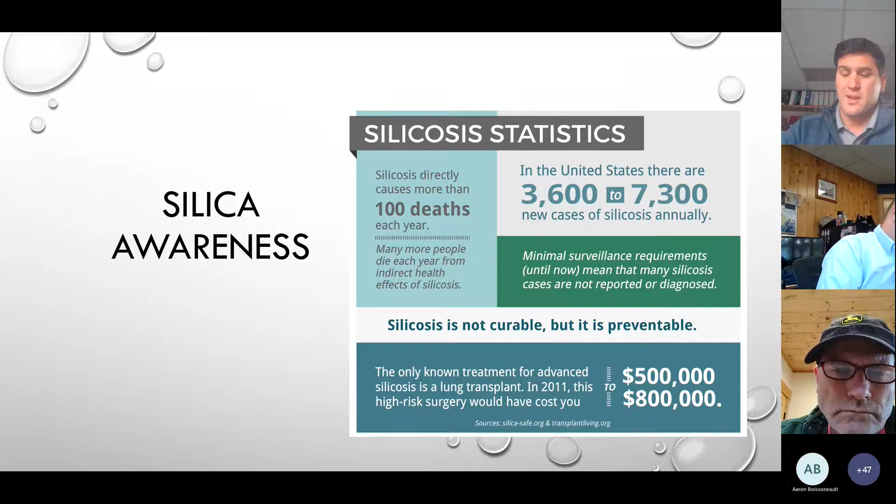So we need to do our best to try to control the dust, and the way we do that is follow our Table 1. For us, it's utilizing an integrated water system anytime we're doing circular cutting, or there's a dustless collection system, which is our Hilti-Vacs, for any time we're doweling concrete or drilling into it or chipping it — try to either water it or vac it up with a vacuum.

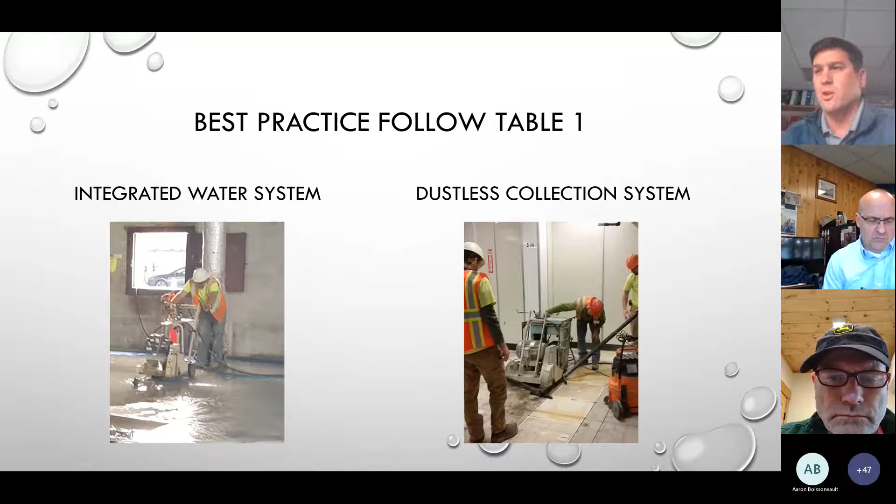The vacuum is located in Tal Nelson's office. We have about 4 of them now, and a lot of our integrated water systems are all available in the tool crib. If you're looking for any shrouds or hollow drill bits, those are also located in the tool crib. For any alternative methods that's not on the table — and I'm going to show everybody where Table 1 is located in a second — we do have two dust monitors.

Dust monitors that we can collect and send out to a lab to see how we're doing with those environments. Again, the standard is 50 micrograms per meter cubed for an 8-hour day. We've done it for our grout mixing plants, and we're under the threshold there. But if there are any unique situations that we're unsure about how to control dust, please contact me so we can come up with a good best practice to make sure we're in compliance with the standard, and most importantly, that we're not exposing our workers to a potential health hazard.

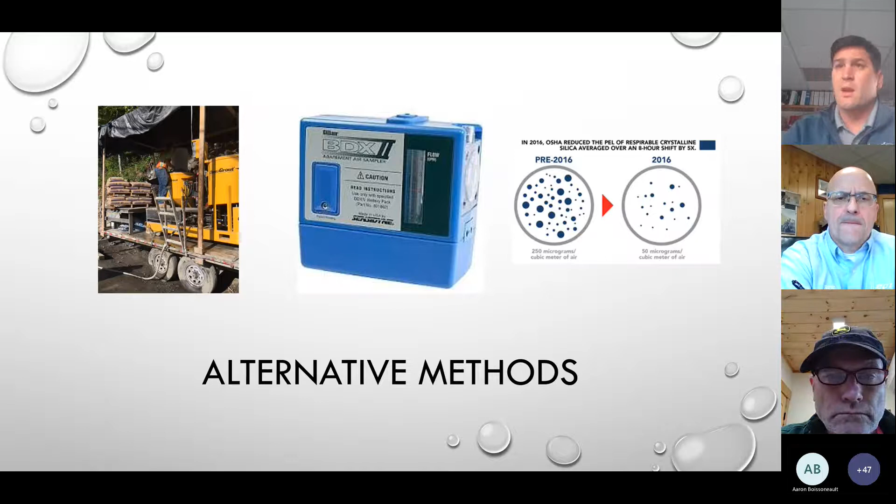Our Silica program is located in our Teams Foreman channel under Files and Library. You'll see it there. So when you're moving through the channel, I'll try to quickly share that to show everybody where it is.

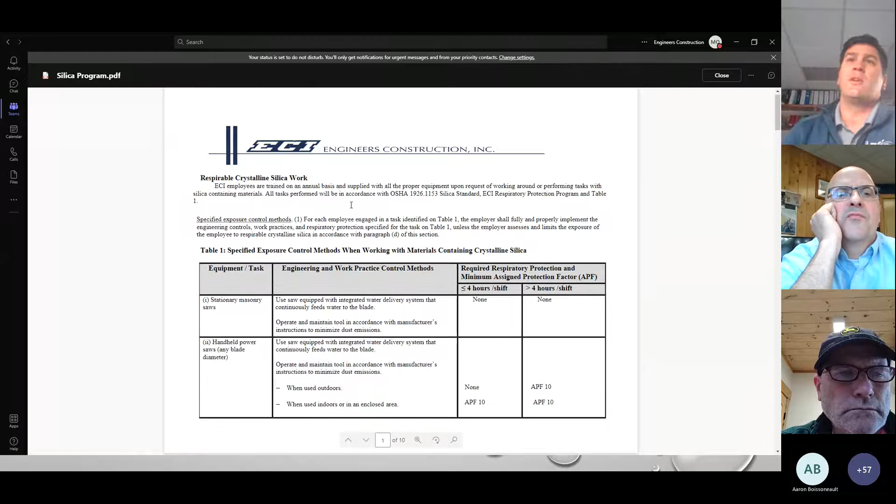Do a quick little exercise here. Thank you, Matt. On your Teams Foreman's channel, you click here, you click General, you hit Files, and then Library. Then you can see all of our program manuals that VOSHA loves employers to have, and here's our Silica program right here. You click it, and you'll be able to see our table, a little brief description of how we want to operate and best practices, and here's our table.

So handheld power saws — this is the majority of what we do out here. Use a saw equipped with an integrated water delivery system that continuously feeds water to the blade. If we operate and maintain the tool according to the manufacturer's instructions to minimize dust, when used outdoors less than 4 hours, we do not need any respiratory protection.

If it's more than 4 hours, that's when we start having to use the APF, which is your assigned protection factor. 10 is just a dust mask. Once you get into the 25, that's a half face respirator. 50 is a full face respirator, but we don't really get into those scenarios all that frequently.

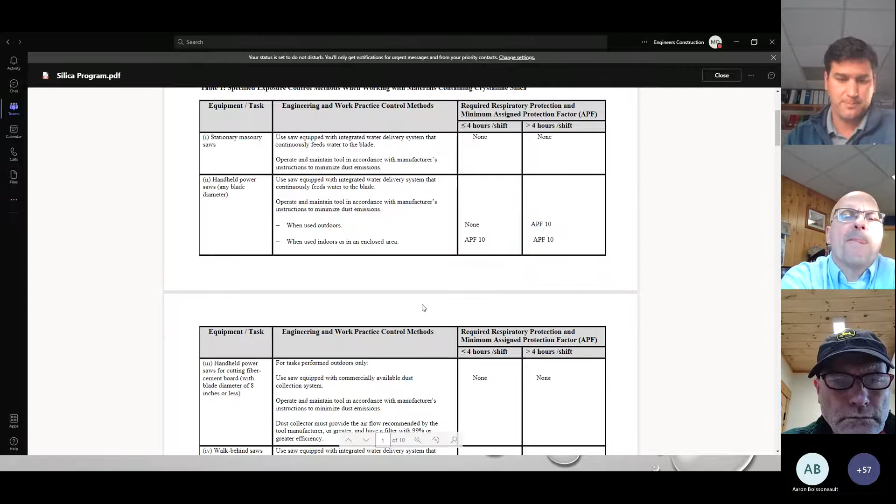So if there's any more questions on Silica, please contact me after the meeting. And Ken, if there's anything to add, feel free to jump in. If not, you can take control.

It all sounds good. Are we likely to be asked about this program and to show the program if there's an OSHA compliance officer that stops by? So would they ask our field superintendent to show them that, or would that be something they would allow a response back at a later moment anyway?

Best practice would be to nip it in the bud right away. Yeah, you give them time to think, they'll add stuff, and then we'll have to fight to get it removed.

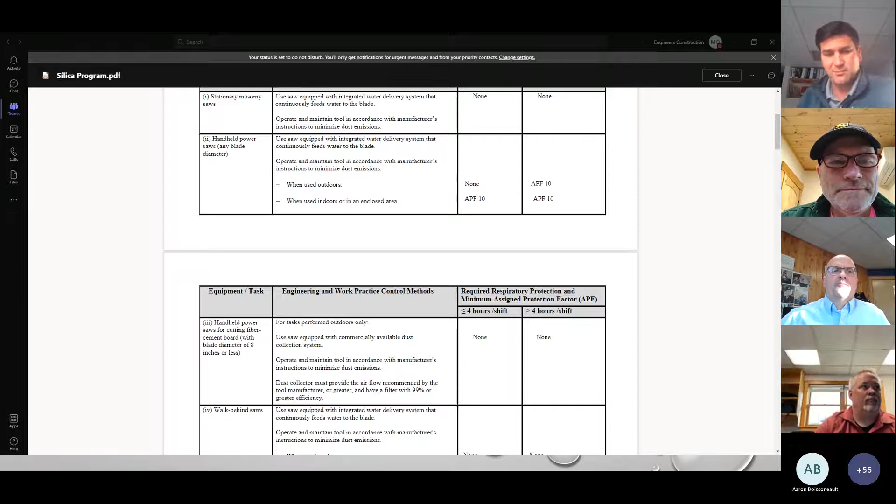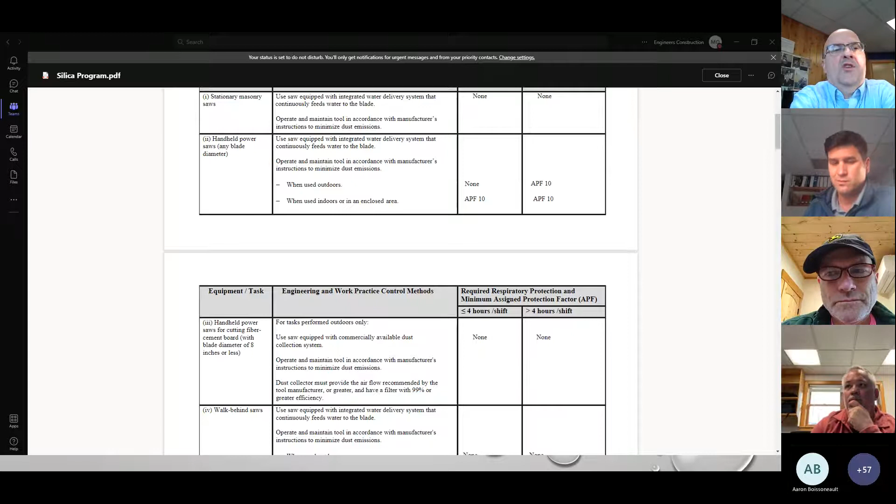So Matt, I think it's good when you're out visiting with the guys, sometimes just help them make sure they know how to navigate to this section of Teams on their tablets. I have pretty good luck on my phone with Teams sometimes to look stuff up in this channel. So maybe a little bit of help to the guys when you're out there. Say, hey, show me how you can navigate to the Teams channel so I can make sure that you can do it. Because they may not ask you.

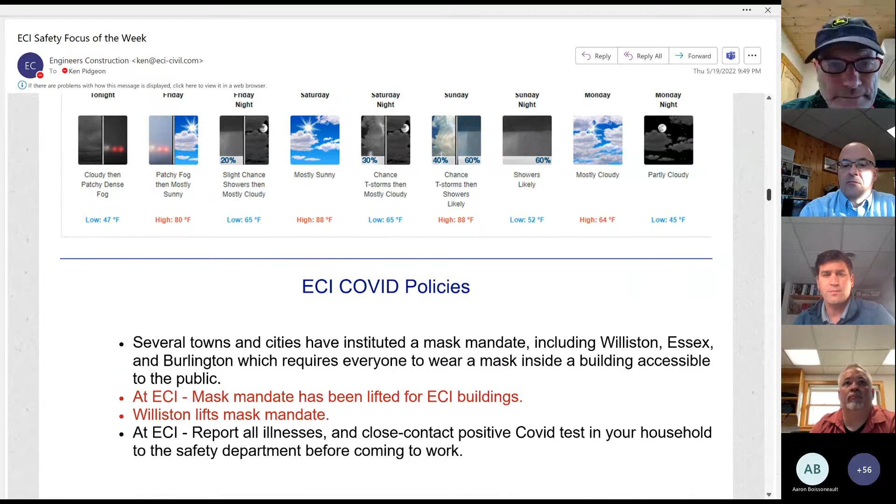Matt will send out a Teams reminder that any crews working tomorrow would be allowed to wear shorts if their project allows, and a reminder to take other measures to protect yourself from heat stress. COVID policies are attached again, no changes there.

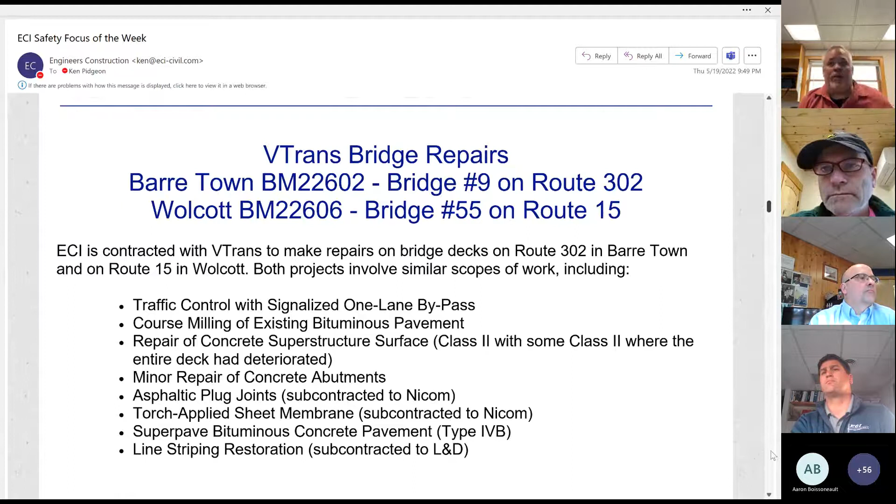Barre is, I believe, Brad finished yesterday, so that one's complete. And Wolcott, I believe he's pouring concrete today on the second phase, so the first phase is done. Dan Borbeau also got up there in Wolcott and got that one started and did the first phase. And then with the additional work in New Haven, he's kind of been down there with Alec, championing that one. And Brad stepped in and is going to finish up Wolcott for us.

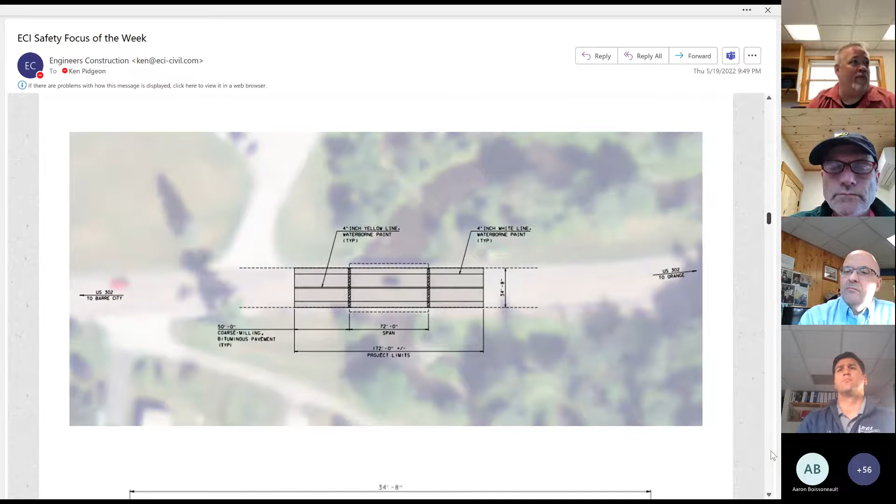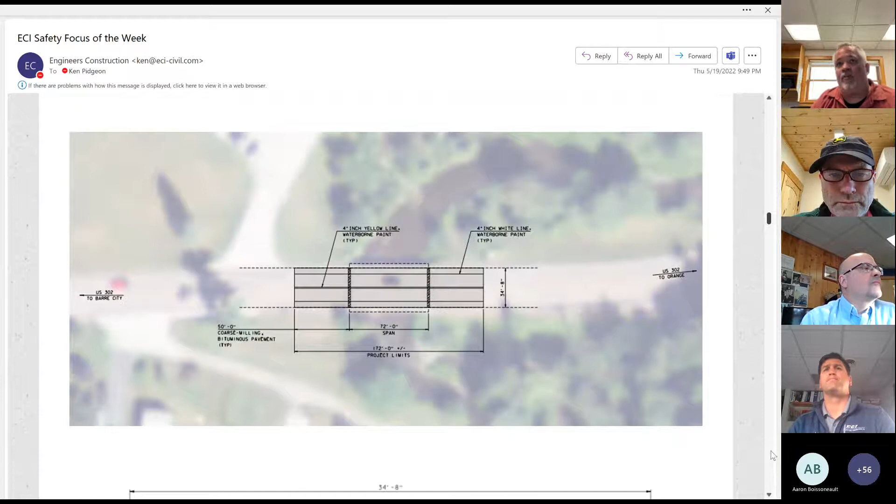So this one here, I believe, is very similar to Wolcott, except Wolcott's a little bit smaller bridge. Basically, you can see we've got the bridge itself in the 72-foot span, and then 50-foot approach on either end. The approach work is just milling and paving. And then the bridge work itself, as I said, was what I call dental work - basically go in and chip out the bad concrete, typically down to the first mat of rebar, and then pour it back. And Wolcott was pretty much the same exact design as Barre.

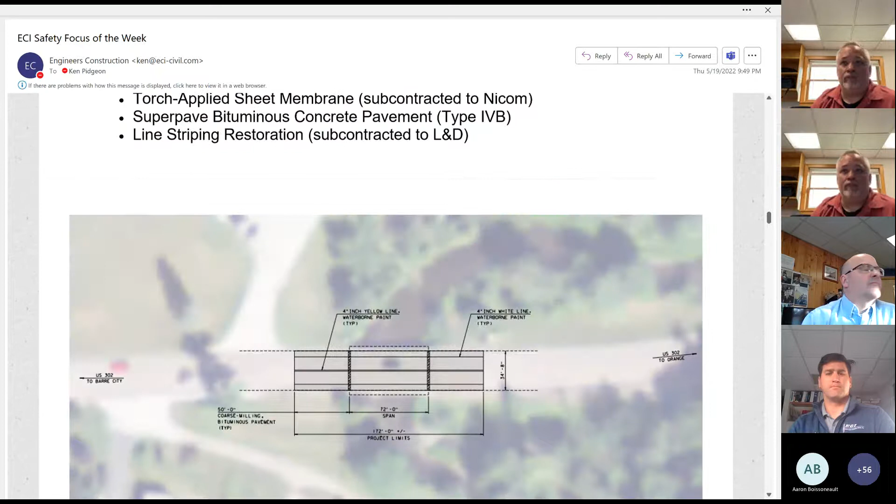All right, I'm messing up here. I just wanted to get the section in for - this is the first bridge here.

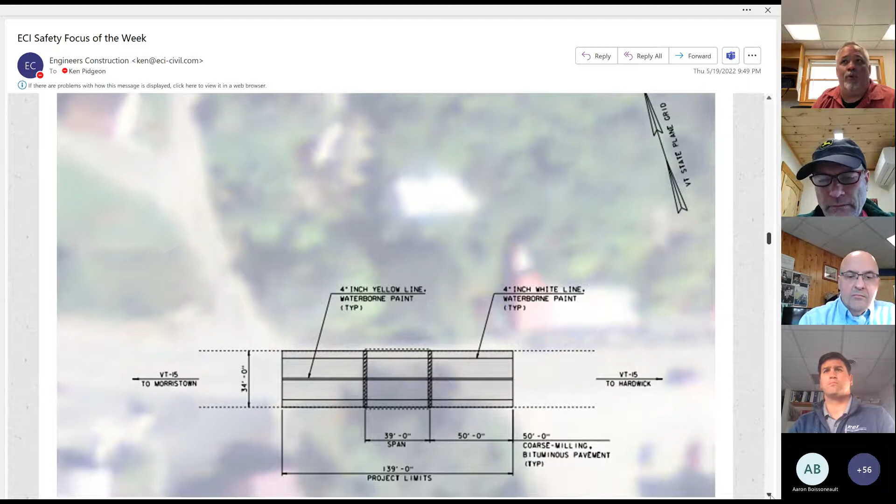Barre was a steel beam construction. Wolcott actually was concrete T-beams. And what we found in Wolcott was a project had come through after the original construction of the bridge and had redone the outside T-beams, so those were in a lot better shape than the center. Basically, the repair work was along the center of the bridge on both sides, because that's the original construction, and the concrete had deteriorated more there.

Both jobs ended up with a little bit of what they call class 3 repair, which is where you go right through the deck, and we had to do full depth reconstruction in those few spots. Barre had a little bit in phase 1, I don't even believe we had any in phase 2, and Wolcott was just the opposite - we didn't have any in phase 1 and had a little bit in phase 2.

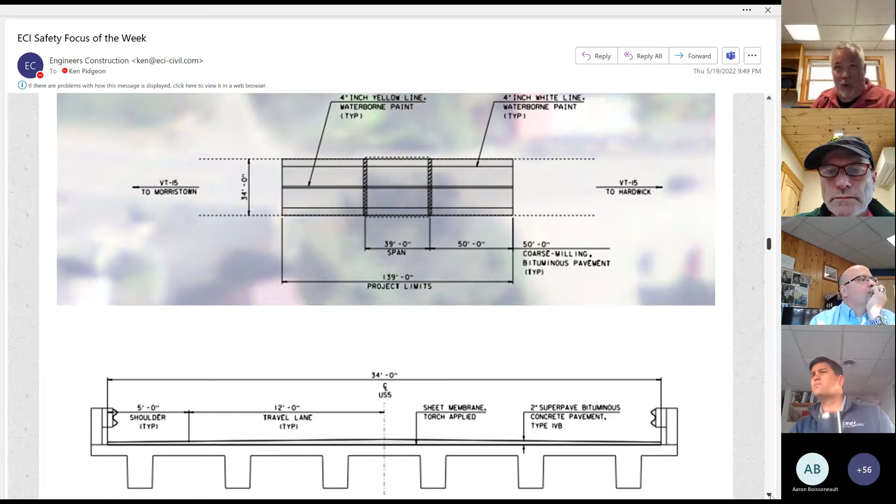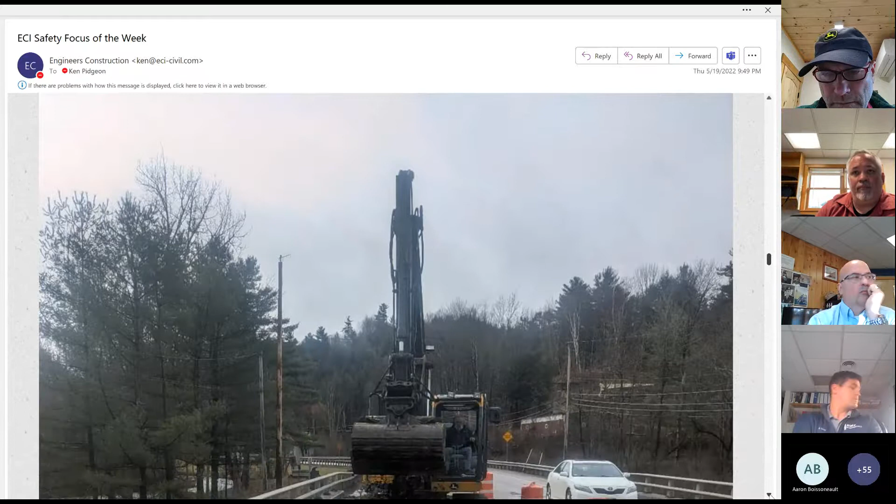This one is a picture of Dale in the excavator pulling the pavement off. You can mill it, or you can pull it off with an excavator. This one's Barre specifically - Brad ended up pulling it off with an excavator on both sides just because of scheduling with a cold planer. It worked out better to just go and pull it off with the excavator.

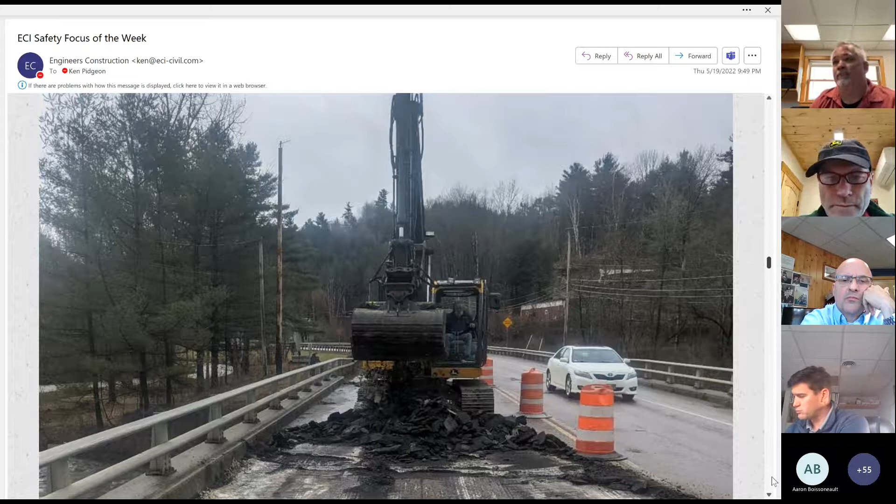Wolcott, we actually milled - here's a picture of the milling. You can't see it here, but there was about 7 inches of asphalt on the deck in Wolcott. Jim had to go back and cold plane the tapers out further because they didn't want to put 7 inches of hot mix back on that deck when we were done, creating that sort of dead load on an old bridge.

So Daryl and company went back, and on one end we extended the milling an additional 50 feet, and on the other end it was an additional 150 feet, which resulted in a change order, of course.

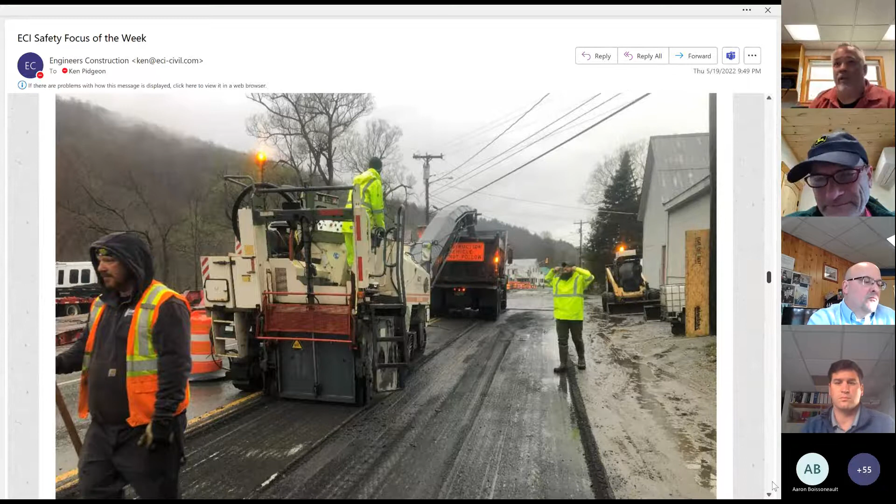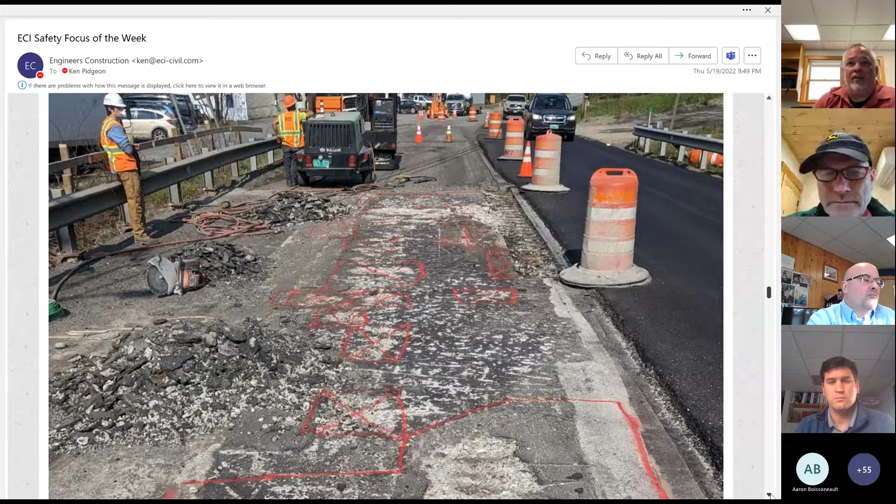We work with Jeremy Salvatore - I know some of you have been out there with him from the state, and he's been pretty decent to deal with, very fair. You can see here the red paint represents the spots where they need to be chipped out, and they do this by what they call sounding. Basically, depending on who does it, some drag chains on the deck, some take a metal bar and drop it, and you can hear the difference between a ping and a thud.

You can see this one specifically is Wolcott. You can see the repair - as I said, we're down the center of the bridge, not so much on the outside edge. Interesting.

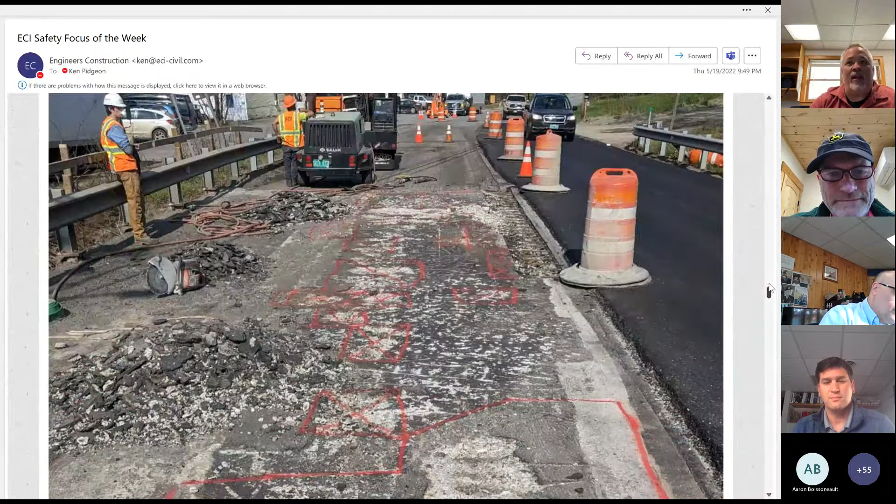This one again is Barre. This one had more spots to it. You can see they were chipping out the concrete.

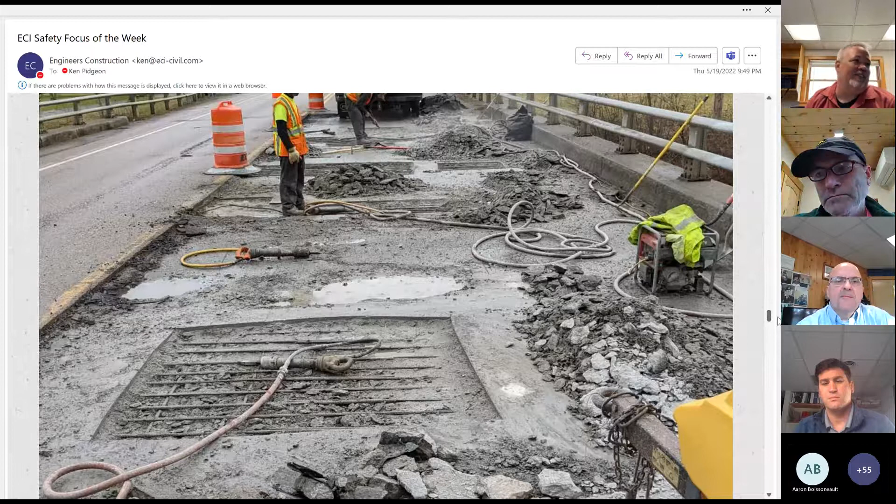Both projects exceeded - I believe Barre had a 30 square yard quantity for repair, and Wolcott had 15 square yards - and both projects exceeded the contract quantity just doing phase one. A lot of work.

You can see this is where they've tied back in - that spot where the hole is through the deck, that's class 3. Class 2 basically goes to the second mat of rebar, class 1 goes to the first mat of rebar. In this case, you can see they spliced in some on the bottom side. Class 3 is when you go completely through the deck. Class 1 and 2 are paid by the square yard, and class 3's payment method is by the cubic yard specifically. Kind of scary looking at a bridge with a hole in it.

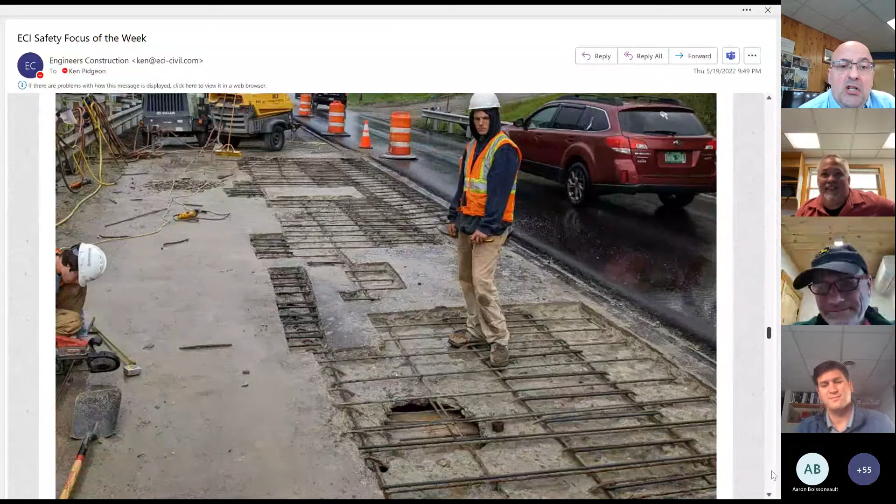Yeah, it's all better now, or will be good soon.

Here they're pouring in the patches. You can see the Carroll truck in the background there. Sometimes, depending on quantity, we will hand mix these, but in this case, with this sort of quantity, it made sense to get ready mix concrete out there and do the repairs. Specifically, we typically pour what the state calls class AA concrete, and AA represents the size of the aggregate. A class A would be a 4,000 PSI, 3/4 inch max size concrete, while class AA drops it down to 3/8 stone. Basically, the reason you might do that for repairs is you're trying to get the material into smaller areas, so you typically will go to the smaller stone.

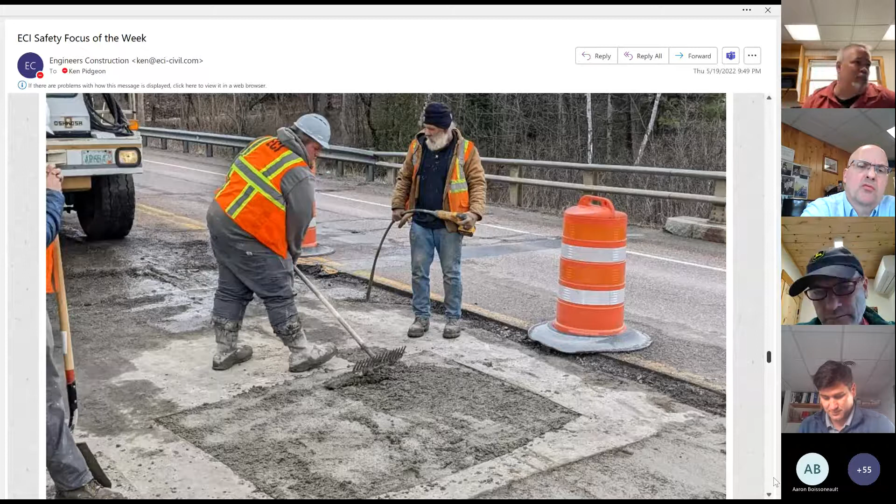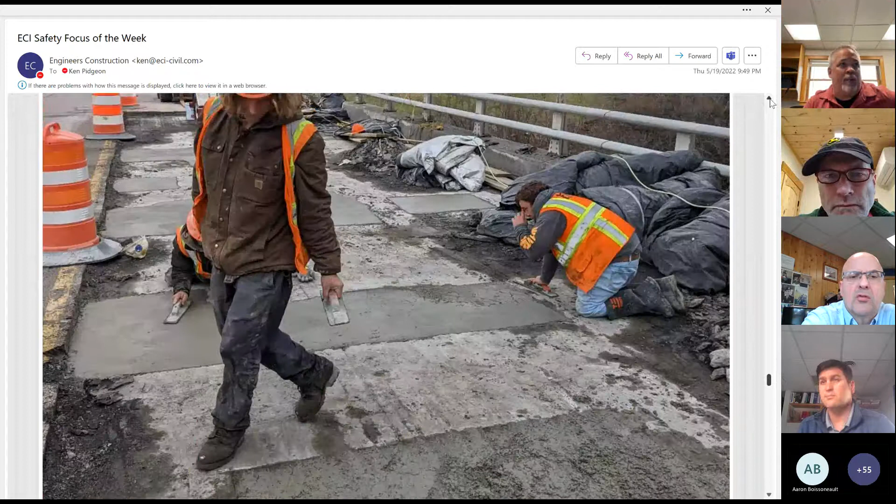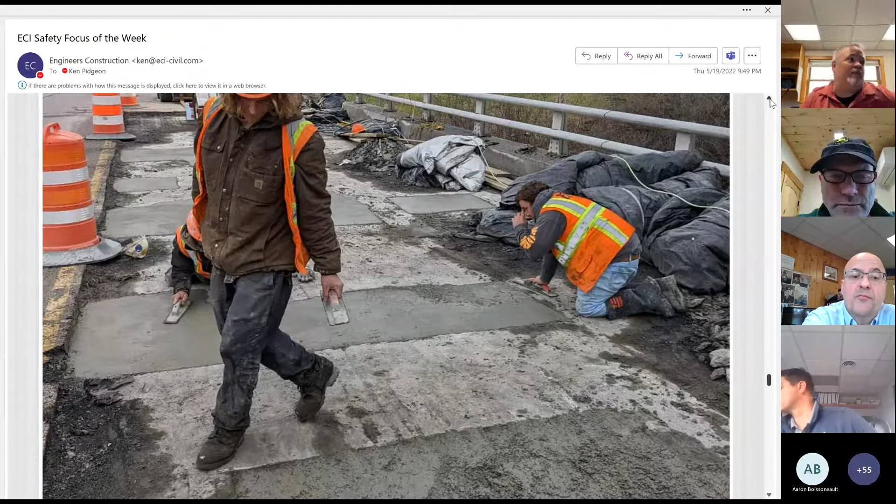They're finishing the patches, and you can see the concrete blankets. As Ken said earlier, we're getting into some hotter temperatures, so we wouldn't necessarily have to insulate blanket over these. If we're doing like Brad's pour today, he probably won't be putting insulated blankets - he's probably going to put some burlap and plastic over it.

And these go into a cure period. Typically concrete in Vermont is a 7-day cure unless it's superstructure, which is a 10-day cure. Jeremy's been depending on breaks - we take cylinders to make sure we break at the required strength. Typically, if we get strength in 4 days because of the repair nature, he's been letting us continue with the work.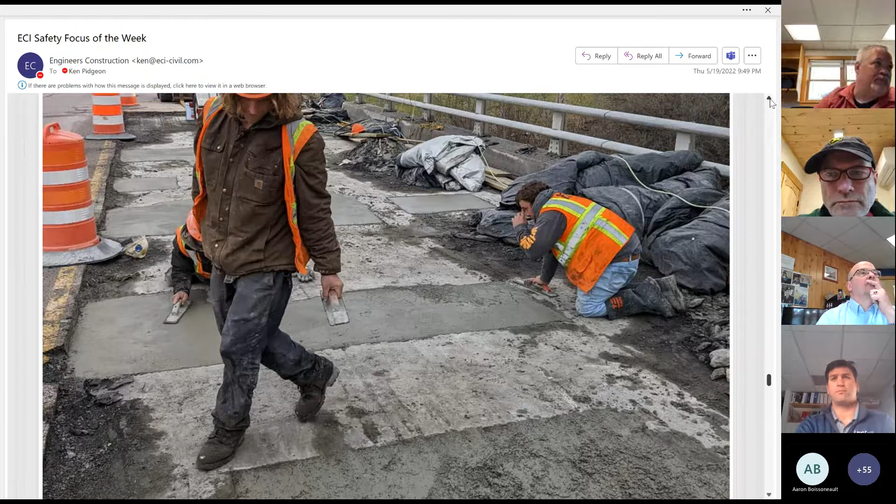Yeah, a new deck would be entirely different. New deck, you'd go to the superstructure requirement, which would be a 10-day cure in Vermont. Other states are 7 days, but Vermont specifically is 10 days.

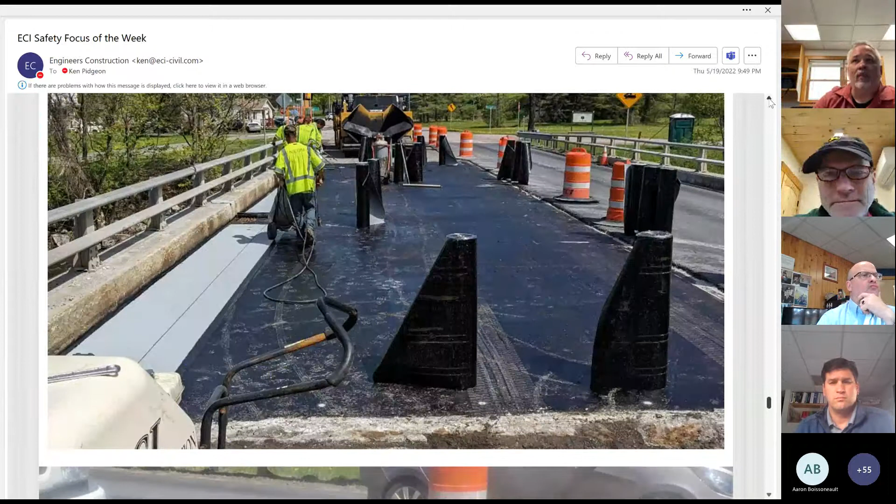This is the membrane work performed by NICOM. Basically, you can see they put down a primer - well, they clean the deck first, give it a light shot blast to take off any laitance. We do a little bit of cleaning before they show up, but they do a quick once over, and then basically put down a primer and roll out this membrane material and tack it down in good shape.

The pavers are there ready to go once they're done. Yeah, Jim's yelling at him, get out of there, get out of the way.

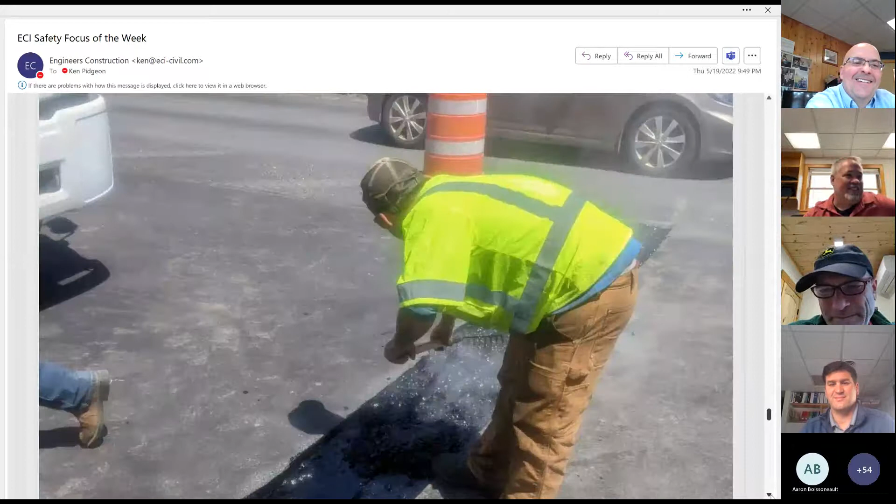This is the asphaltic plug joint, again, also by NICOM. Some of you will remember the membrane used to be AD Rossi. They kept that name for a while, but got rid of it recently because NICOM was purchased by a bigger company called Venture out of southern New Hampshire. They are going to keep the NICOM name, but the AD Rossi name has gone away. So basically the same company, same ownership.

And the NICOM outfit also does the asphaltic plug joints. They basically dig it out, throw some backer rod into the joint itself, and then they have come out with kettles, heat up the material and pour it in here. It's an asphaltic plug joint.

You can see they're putting some cover material. Basically that cover material makes it so it's not tacky, and when you track over it with cars, it doesn't pick it up. And then this is the final wear surface on either side. You don't do the asphaltic plug joint till after you pave.

Because we finished the other side, NICOM did the joint. I think it was Tuesday this week. And in Wolcott, after we're done today, Jim will pave it sometime next week, hopefully when the cure is up, and we can get NICOM in there to do the other section of membrane. And then the following week, after Memorial Day, NICOM will come back and do the joints. We haven't lost a whole summer yet, Mark.

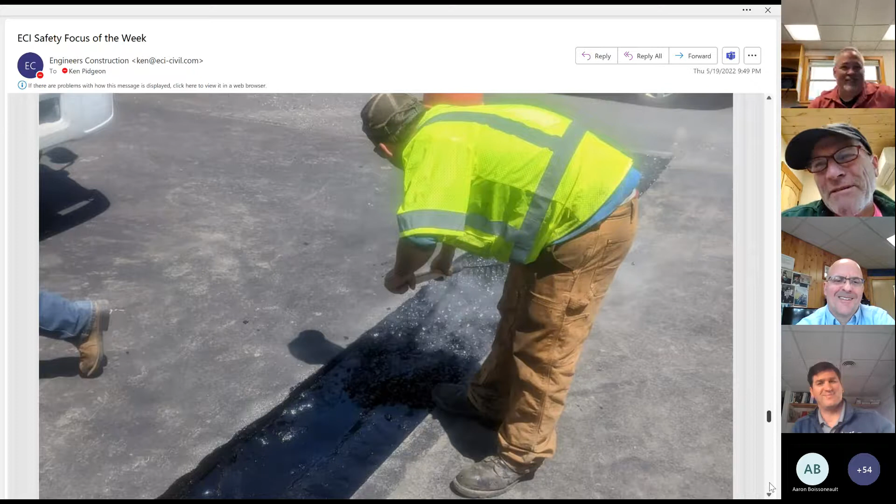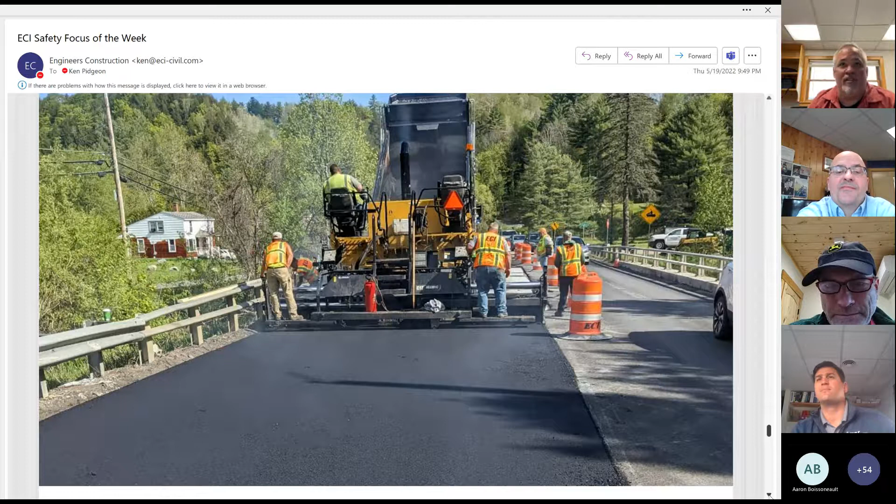There's Daryl and company getting it, turning it black. For us, this is phase 2. Kind of hard to tell, but phase 1 is already done on the right there.

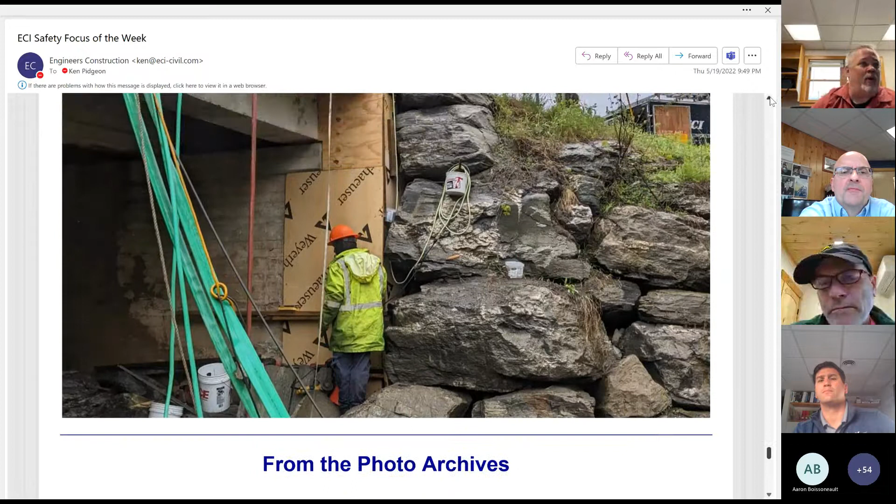This was a change order that was added to us in Wolcott, this last photo. Basically what happened, you can see the stones stacked up on the right - the wing walls. Jeremy thought it wasn't Irene, it was one of the subsequent storms that took out the wing wall that used to be there, and they came back and stacked up stone. And you can see where this is formed.

Basically what happened there was exposed concrete where it had broken off. The wing wall had broken off, and there was no remnants of the wing wall at all - I think it's probably somewhere down the Winooski. We're obviously not pouring back the wing wall. We just doweled in some pieces and poured this corner because it was all exposed aggregate and was going to continue to break off. So just a tiny little repair there to encapsulate that end of the abutment, essentially.

Again, that was a change order. That wasn't part of the original design. The only other design change coming on this one is...

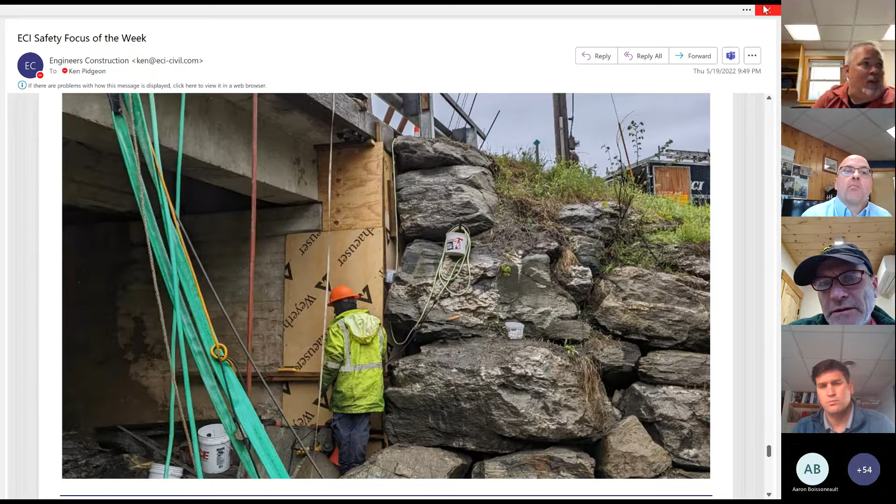You can't see them, but up near the top of the photo, these guardrail posts - you can kind of see it in the one directly under, where the concrete's gone underneath the guardrail post. So Brad's going to go back in and basically retouch up underneath all those posts. Some of them were worse than others, but you can see where the concrete's flaked off. So that also is going to be a little change order.

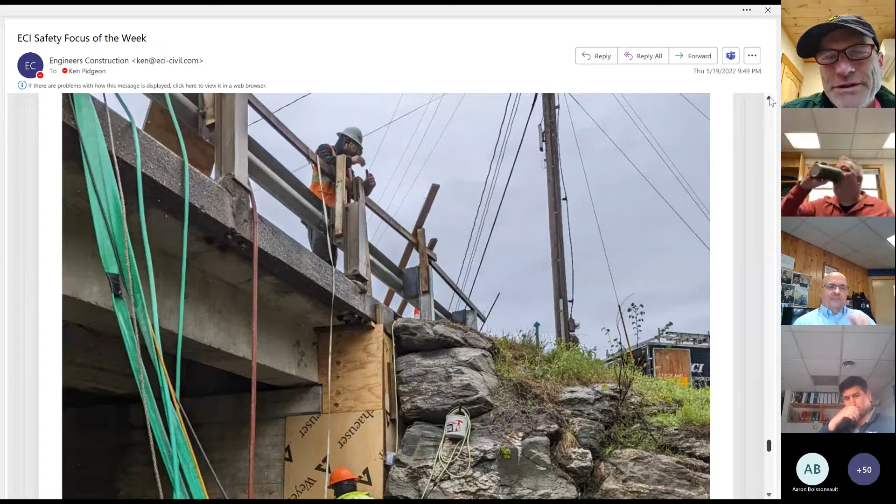I think that's our last photo, Mark. Thanks, Brad, for the photos. This was a really complete sequence between the two bridges to give pretty much every step of the job, documented in an image. That was pretty cool.

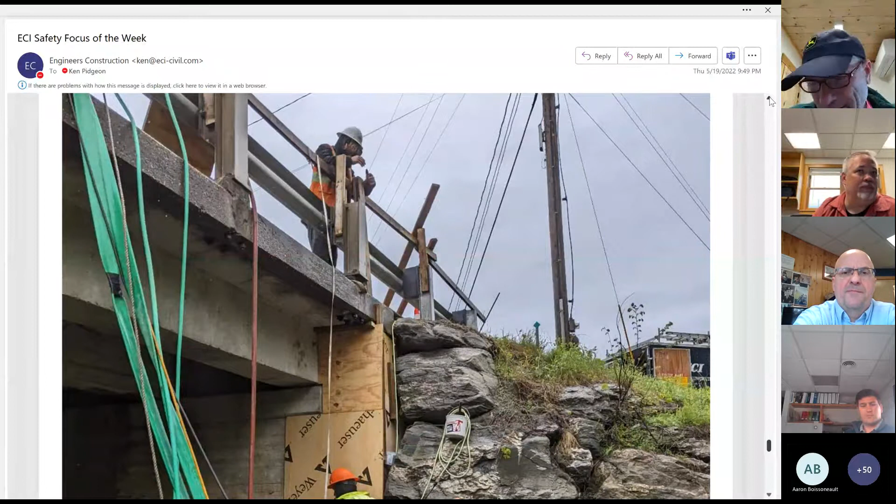Let's go to the archive photo. This is Gentes Road in Colchester, square over the railroad, over the NECR, and that's from 2012. Paving the deck - that's just a beam, a slab beam type of deck and superstructure. Looks so thin, yeah, it does look kind of skinny.

Wasn't it a big repair of those retaining walls? I think so, yeah, sort of a rehab, that's right. Most of the repair on this job was about these retaining walls, and we did pretty much refacing of the walls, and actually I think 10 years ago they were painted or stained white after, for some reason, some kind of sealer or stain type thing on the abutments.

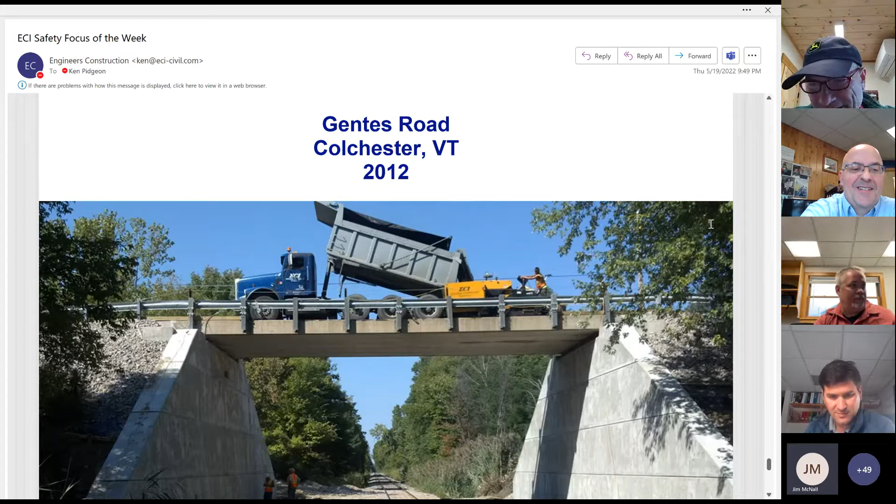I wonder who the two people down below are. Look, that was one of Doug Cohn's last jobs. Oh, Doug and Sully was there. Yeah, yeah.